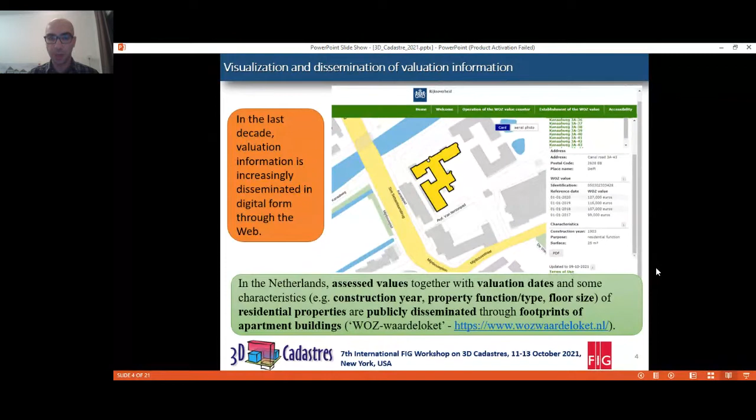However, 3D visualization of valuation units is required in order to disseminate valuation information more effectively and efficiently. In fact, some of the recently developed 3D cadastral prototype models include value as a characteristic of property units. So this leads to ask the following question: can 3D cadastral prototype models be seen as an effective tool to disseminate valuation information?

And this question leads us to our research questions, which are: can an identical or a modified version of a 3D cadastral visualization prototype be considered an effective tool for dissemination of valuation information? And what are the requirements and opportunities for web-based 3D visualization and dissemination of valuation information?

In valuation processes, legal and physical property characteristics are used as input data to calculate property values. But which one should we visualize to disseminate valuation information? Legal space, physical space, or both of them?

According to the International Association of Assessing Officers, land and property rights to be valued is the fundamental information for valuation. Therefore, we can say that land registry and cadastre can be considered as the main data source for both valuation processes and the visualization of valuation units, as they record the rights, restrictions, and responsibilities and their associated spatial units.

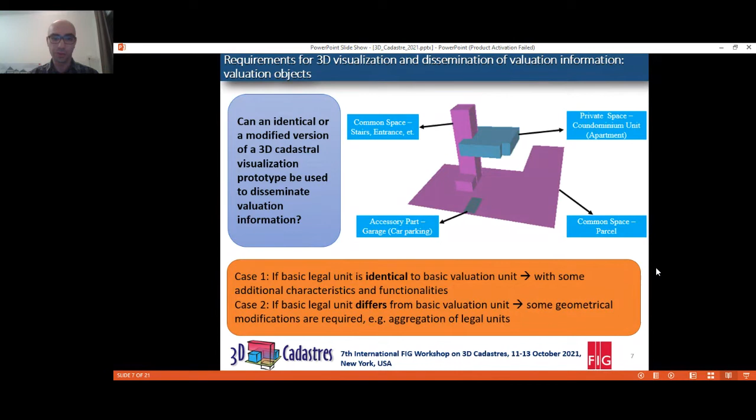But in some jurisdictions, basic legal units differ from basic valuation units. In this case, some geometrical modifications are required, for example aggregation of legal units to valuation units. But in both cases, the experience gained from the studies that developed the 3D cadastral visualization prototype can be utilized for 3D visualization of valuation units.

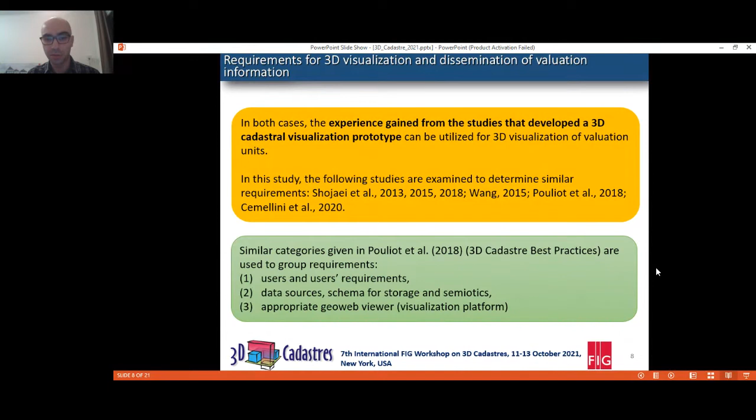We investigate the following studies to determine the requirements which are similar with 3D cadastral prototypes, and we use the categories given below: the first category is users and user requirements; the second category is data sources, data schemas for storage, and data semiotics; and the third category is the appropriate GeoWeb viewer. So we derived these characteristics, these requirements for 3D cadastral visualization.

These requirements are also valid for 3D visualization of valuation units. The users can be lawyers, notaries, real estate agents, or the general public in both cases. And the user requirements are: 3D geometric boundaries should be identified; private and common parts in apartment buildings can be represented and distinguished; 3D measurements can be performed; and an interactive 3D user interface should be available.

As for the data, descriptive or legal documentation can be included, and temporal aspects of property rights should be managed and included. As data sources, survey plans, floor plans, building information model data, and city models can be used. For data schema to store the information, an LADM-based schema can be used, or an extended BIM schema can be used. Semiotics - color and transparency - can also be considered.

For the visualization platforms, the following functionalities can be needed: zoom in, zoom out, color, transparency, spatial analysis, and underground view.

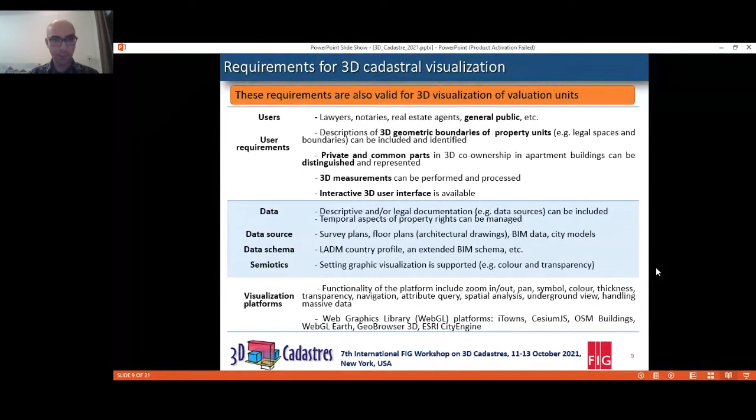So what are the specific requirements for valuation visualization and dissemination of valuation information? In the valuation case, the main users are the appraisers performing private and public valuations, and the customers of these valuations, such as the general public. The requirement characteristics include the value and the valuation date.

In such a prototype, several value types can be shared, and for transparency and accuracy purposes, input valuation data can also be shared—for example, building age, floor area, parcel size, accessory part type, and neighborhood characteristics. A similar data source can be used to visualize valuation units in 3D, and as a data schema to store both legal spaces of valuation units and valuation information.

The LADM valuation information model can be consumed because it includes not only valuation information but also the corresponding legal spaces, and it can be extended to include country-specific situations.

So what are the specific functionality requirements for dissemination of valuation information? Valuation information can be aggregated according to use types and valuation unit group types. Aggregating valuation units into groups can be considered the implementation of level of detail concepts in the visualization of valuation information.

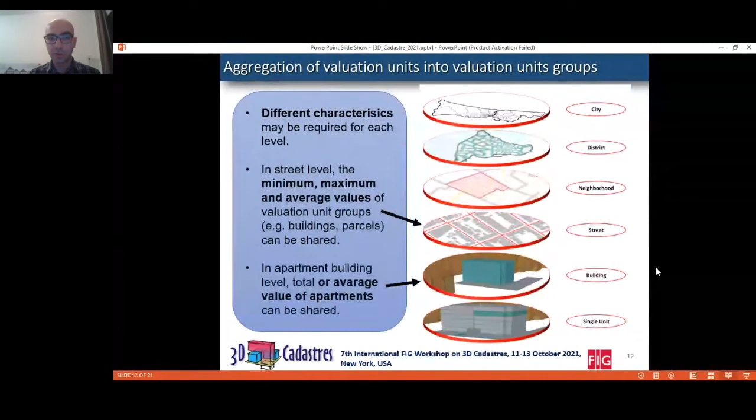In this study, we determined six different levels. For each level, different characteristics may be required. For example, at the street level, the minimum, maximum, and average values of the valuation units can be shared. At the apartment building level, total or average value of an apartment can be shared. At the city level, the average values of valuation units with different use types can be shared.

This approach is similar to sharing sales statistics, but in this case the valuation information is shared with its spatial component. Please note that the valuation information model supports recording valuation information at all these different levels.

So what are the specific functionality requirements? 3D view analysis can be required from a valuation information prototype. Support for thematic mapping and animations to enable effective dissemination of valuation information is required, and this is also valid for the 3D cadastral prototype.

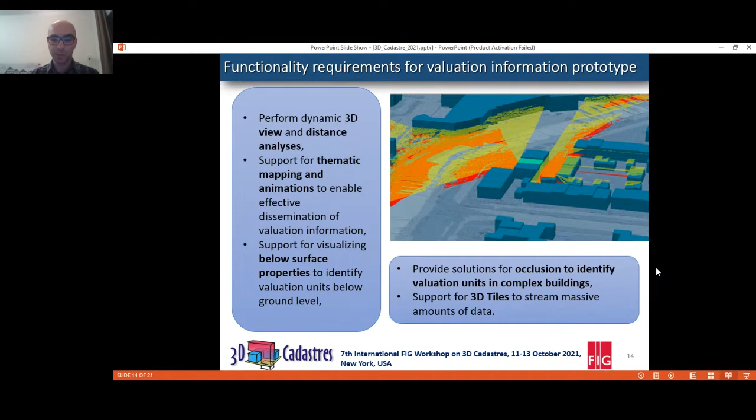Below surface visualization support is needed for visualizing below-surface properties to identify valuations below ground level. Solutions for occlusion are needed to identify valuation units in complex buildings, and support for 3D tiles to stream massive amounts of data. We investigate these WebGL tools.

We evaluate these WebGL tools, and our aim is to find an appropriate web-based solution for visualization and dissemination of valuation information. According to the requirements, two web viewers came forward: CesiumJS and 3D Tiles RenderJS. In our case, CesiumJS was selected because it provides the opportunity for 3D analysis tools, for example visibility analysis.

It supports time-dynamic visualization by means of the CZML format. With CZML format, you can create animations and thematic maps. CesiumJS is widely used in the domain of land administration by a large group of users, and the 3D tiles format is also developed by the same group. Because of these reasons, we selected CesiumJS, and this is the prototype we developed.

You can see the condominium unit information. You can select each condominium unit in this building. As you can see, legal spaces can be identified and selected. Hovering over the condominium unit, the color of the accessory part automatically changes.

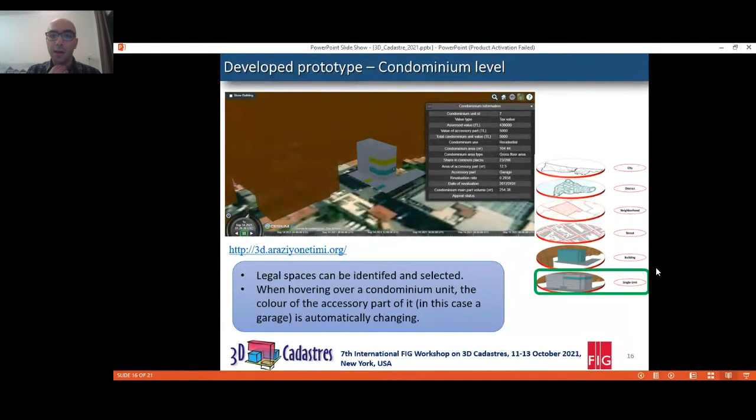When you click the condominium legal spaces of the condominium unit, you can see the characteristics and valuation information about these condominium units—for example, condominium use type, accessory part type, and valuation date are shared at this level.

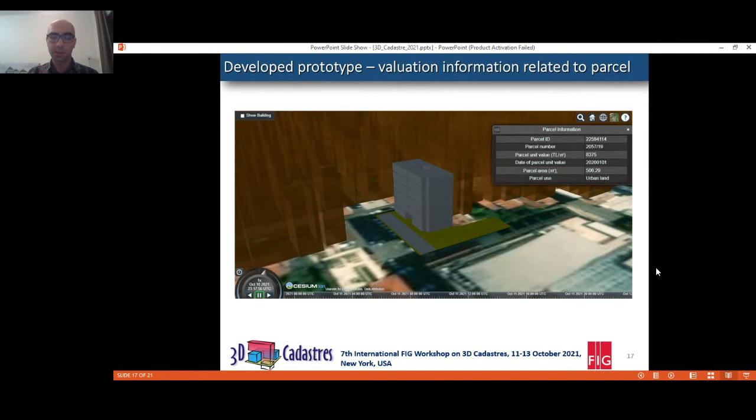You can also click the parcel to reach extra information about it, for example parcel unit value per square meter and date of parcel unit value. You can also select the building.

When you select the building, you can see some characteristics related to it, for example construction type, building age, and the unit cost price per square meter.

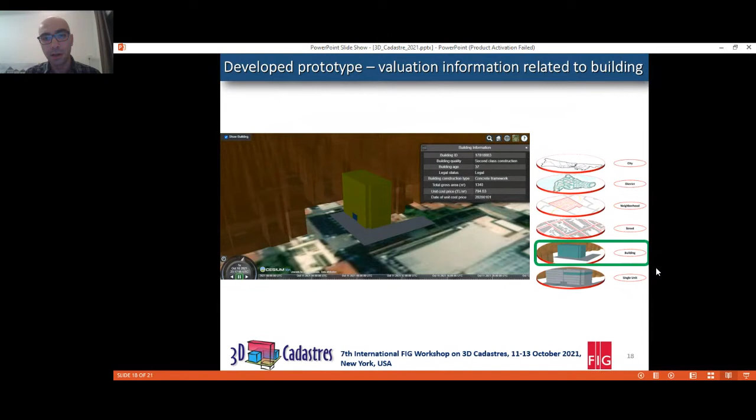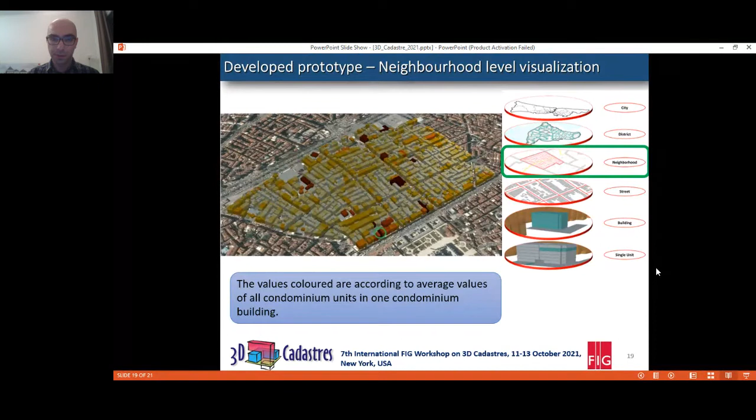So, concluding remarks. Developing a web-based system for visualization and dissemination of valuation information and their characteristics is a challenging task. An identical or modified version of the 3D cadastral prototype can be used for dissemination of valuation information with some additional characteristics and functionalities. On the other hand, having the option to visualize both legal and physical spaces of valuation units in the same prototype system would further support effective dissemination.

The developed prototype shows that the LADM valuation information model complete schema can be used for data storage, which can be used as a basis for visualization. The aggregation of valuation units into groups to share valuation information may be a good approach to implement. This suggestion may improve communication with users.

As for future work, I should note that this is an ongoing work. The developed prototype is not completed yet, and there is a lot still to be done. For example, the prototype system should be enriched with extra functionalities, such as more thematic mapping and 3D measurements, and it needs to be tested with more complete datasets. One obstacle is that it is very hard to find condominium-level information even in a neighborhood. Therefore, a methodology to derive relevant spaces in a building should be considered. Thank you for listening to my presentation.

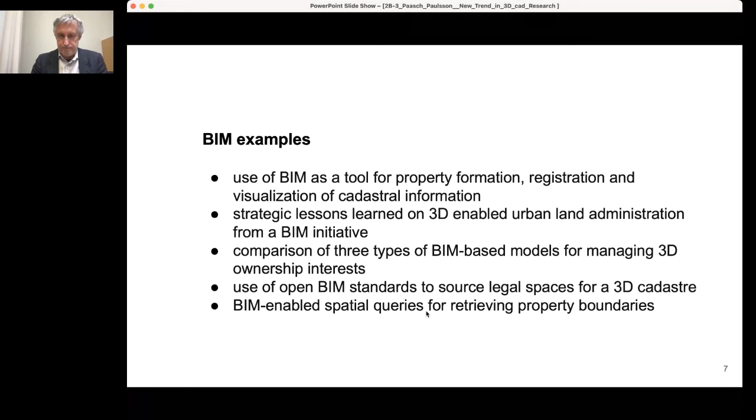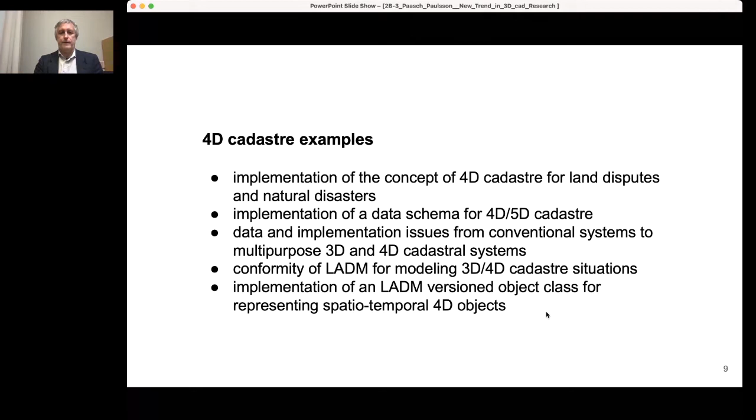The next topic is 4D cadastre: development of the concept of 3D cadastre by adding a time element. Here we have some examples: implementation of the concept of 4D cadastre for land disputes and natural disasters, implementation of a data schema for the 4D/5D cadastre, data and implementation issues from conventional systems to multi-purpose 3D and 4D cadastre systems, conformity of LADM for modeling 3D and 4D cadastre situations, and implementation of a LADM versioned object class for spatio-temporal 4D objects.

The third topic is marine and water. We all have a dream maybe of living by the sea and owning a plot of land at a beach, so water is a very important factor in land management - I would call it land and water management. That can also be from a legal aspect, who owns the water area or the area down to the water, and technical aspects, as well as developing an international institutional framework and administration system for it. We are used to a land cadastre, but water cadastres are not that common.

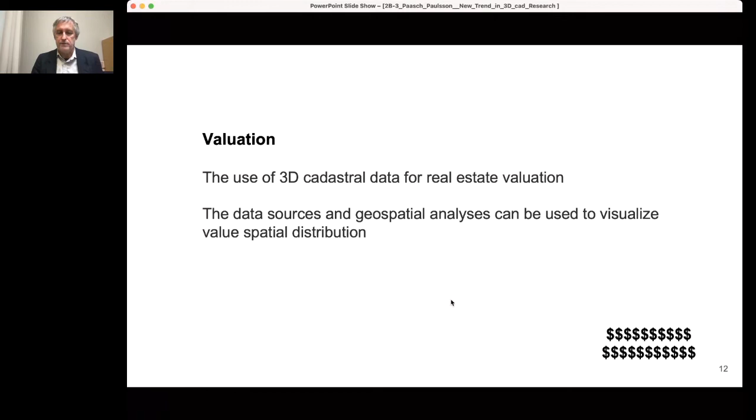Here we have some examples: possibilities of mass real estate valuation based on 3D vector terrain models, the role of semantically rich 3D building models and 3D cadastres in relation to valuation and taxation, the development of valuation approaches in relation to cadastres, why and how the CityGML modeling standard can be used in real estate valuation and transaction applications, the use of 3D data for better quality value estimation in the context of the LADM valuation information model, and developing 3D valuation unit profiles.

So we can see there has been some interest in these areas, and they are quite evenly distributed among our research networks. For example, BIM is mostly Australia, the Netherlands, Korea, and Sweden - just examples, there are more. There's also 4D cadastre: Croatia, Germany, Turkey, Indonesia. Marine water: Trinidad and Tobago, Greece, Argentina. And valuation: the Netherlands, Germany, Turkey, the USA, and the United Kingdom, just as examples. The interest is quite widespread.

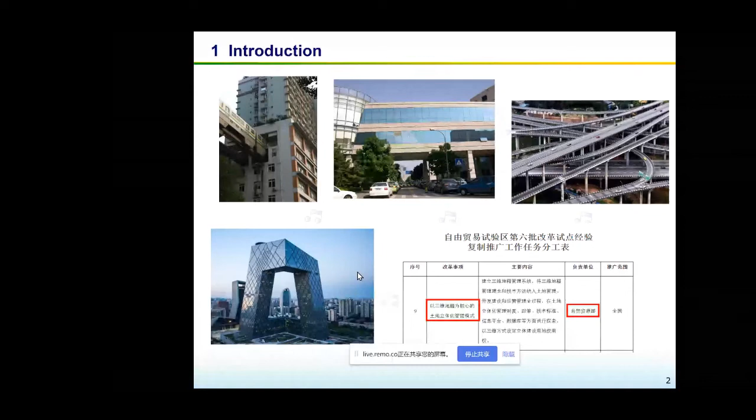Here show some cases. Buildings and construction normally have a plain ground with the same surrounding elevation. However, it was not always this way. Mountain area occupies 2/3 of land area in China, and many buildings and constructions are built on uneven ground, especially in Chongqing city, a very famous mountain city. The picture shows some scenarios in Chongqing.

So when we talk about buildings, we naturally assume that the building is located on the Earth's surface. Here, Earth's surface becomes a key reference for building to describe location relationships. If the different sides of the building are not flat or have different elevation, different height, where is the ground? Which level is the ground level? We should think about the spatial description.

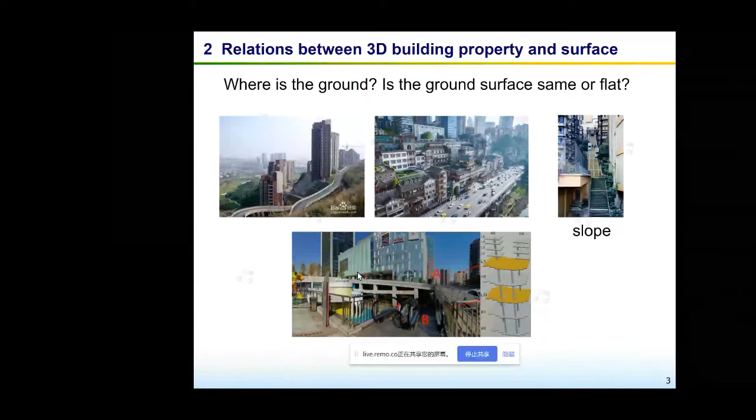This slide shows the reality of one case. Two neighboring buildings have different grounds. They are not purely horizontal or vertical neighbors, but diagonal neighbors. For the upper left building, its ground is labeled as ground B. However, it's very clear that ground B is also the top of the lower building. So when we talk about the Earth's surface or the ground level, where is it?

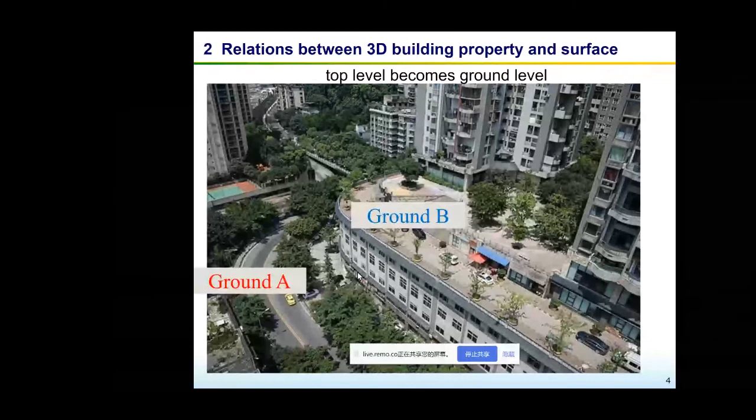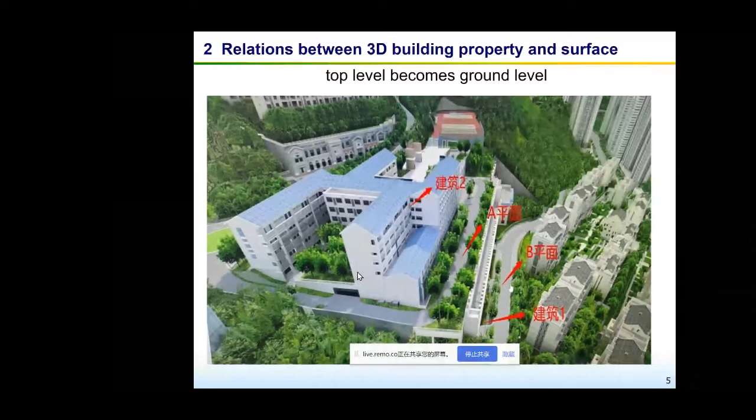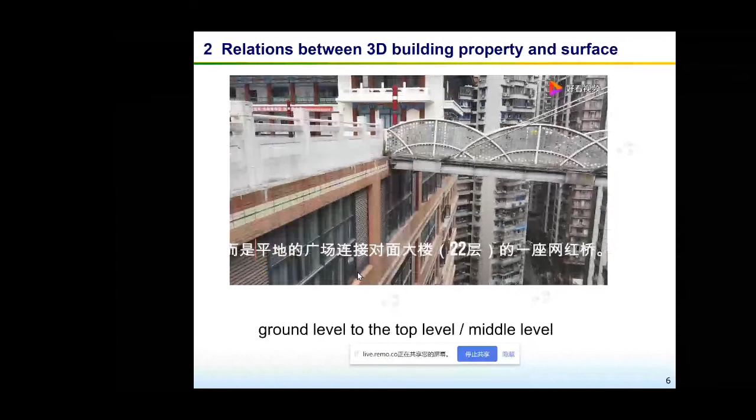This is another case for the diagonal overlap in Chongqing city. And this video gives us a surprise. From the view, we know that this location is the plaza or platform, the ground surface for the surrounding building. But when we move to the place, we find two bridges. And under the bridge, there is still a 22 floor building. So the ground is different at different places, or even for the same building.

Also, I would like to emphasize that these cases are very common in Chongqing, the mountain city, not a minority.

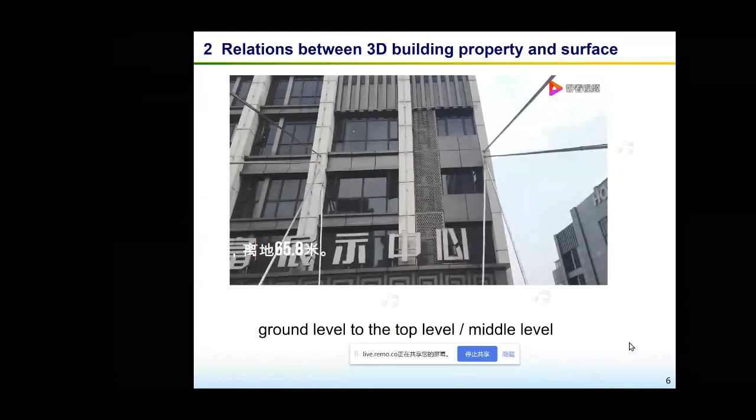So in order to clarify the relationship between the building and the Earth's surface, we must make certain the Earth's surface morphology. We divide the Earth's surface into three types: planar surface, slope surface, and terraced surface, as the slide shows. Also, we define the bottom face as the lowest bottom face of the building, and also the base face, which is where the building entrance locates, and this base face will touch the Earth's surface.

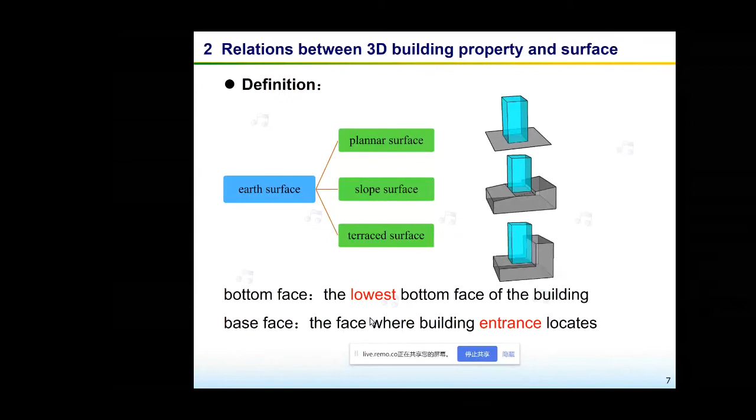Taking terraced surface into consideration, if we compare the building property with the surface ground, it could be three categories: one, the base face coincides with the bottom face; two, the base face doesn't coincide with the bottom face, which we can judge from the different height; and there are multiple base faces and only one of them coincides with the bottom face.

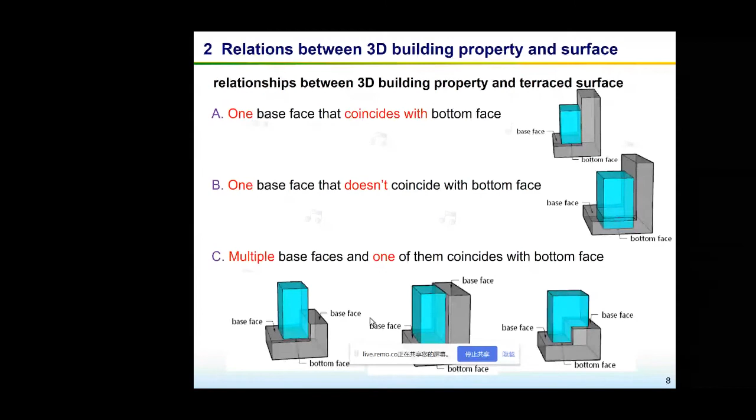If there are multiple base surfaces and one of the base faces coincides with the bottom face, combine the elevation between another base face and the bottom face - there would be three types, as the slides show. This case illustrates one type. Please be aware that here we only list the situation for one building.

If there are multiple buildings involved, the scenario is more complicated. So a clear description of the relationship between the building property and the terraced ground can enhance the floor semantics about the building, which could be crucial or important for 3D property description.

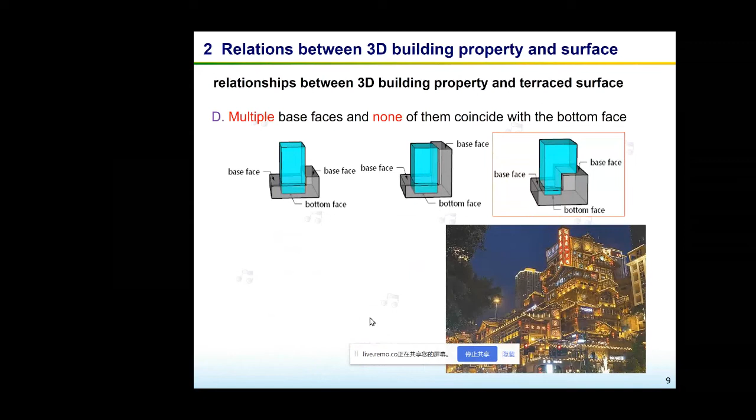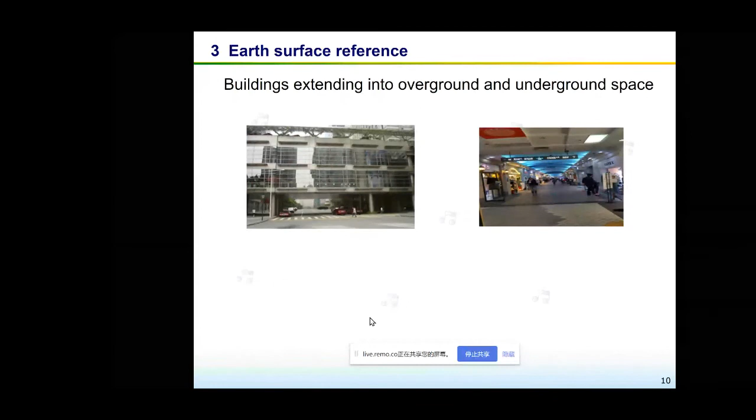Even if the ground surface is flat, we still need to understand the building space and underground space to get the correct relative locations compared to the ground surface. We know modern construction techniques support building and man-made structures extending into the air and underground.

The spatial location and shape of a 3D building property in 3D cadastre should be clearly portrayed. Also, this explicit description should include a spatial reference to the Earth's surface. So 3D relative vertical location can be described in 4 types: the building is on the surface, in the air, underground, or across the surface.

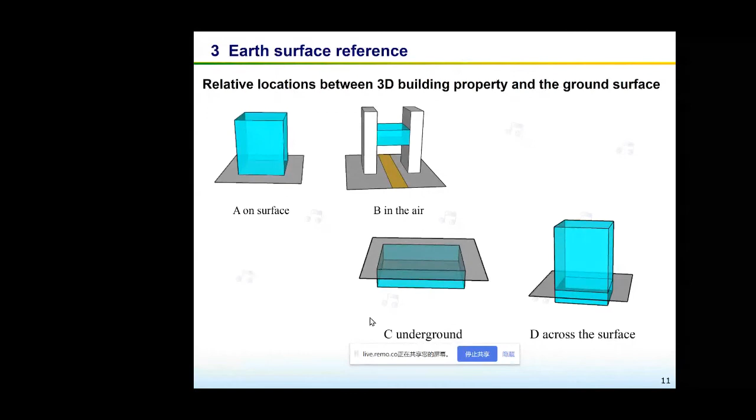We are very familiar with the 2D surface parcel. So when we talk about the 3D building property, 2D surface parcels are often used as a reference. This section illustrates the correspondence between the 3D building property and the 2D surface parcel.

One 3D parcel may touch more than one ground surface or ground parcel, like an overhead building connecting 2 buildings with a ground parcel, and an underground station connecting several surface parcels by its entrances and ventilation openings.

Yeah, it's an amazing thing in Chongqing.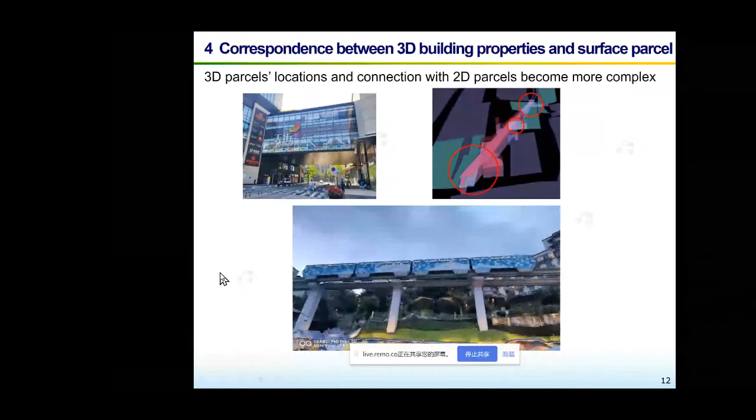I'll change it. So we can get the correspondence between the 3D building property and the 2D surface parcel in 4 types: one-to-one, one-to-multiple, multiple-to-multiple, or multiple-to-one.

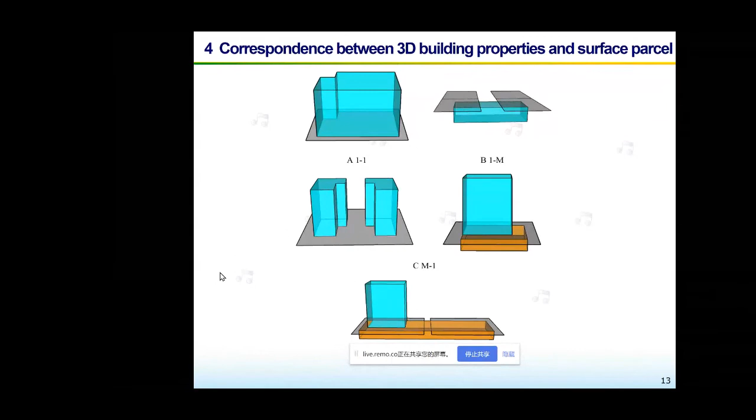So, a short conclusion: 3D building property is the main object in 3D cadastre. This presentation illustrates the classification between 3D building property and the Earth's surface with different cases, and these cases are very common in Chongqing, China.

So we must focus on the spatial description. It would enhance the description in 3D and promote our understanding of the spatial situations for 3D building property. In the future, further analysis about the consistency between legal geospace and physical geospace of building property, and their correspondence, can be made for 3D property units.

Like the dissemination about the property unit - I hope with the figures and the cases, the demo, we can analyze the building property compared to the Earth's surface. We can realize the complexity of describing 3D building property spatially.

And also in China, we now have raised a Chinese national standard of spatial description about the 3D property unit. It will be used for the registration of the 3D property unit. Thank you very much.

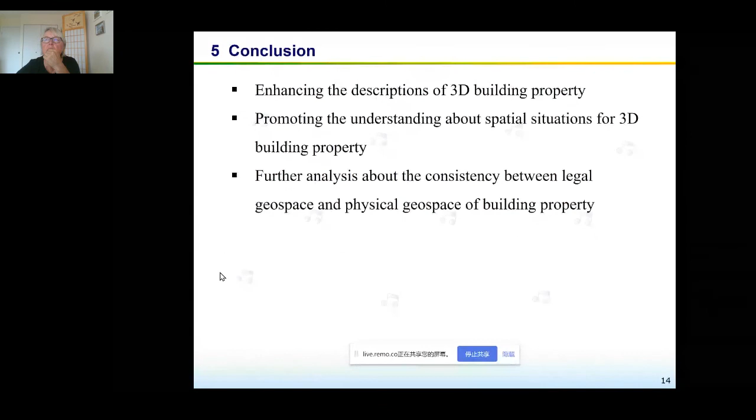I would like to start with the first question. Well, it was really impressive, the train going into the building. Wow, yeah.

Can you explain a bit more how ground surfaces are currently mapped in China or defined in China? And why is it so important to have this ground reference? Can you say a few words to help us understand why it is interesting and important to have your work?

Normally we think the ground surface is flat, and the ground surface around the building is the same. But in mountain areas, it's quite different. Even for just one building, the front has one height, but in the background it's another height. So different entries at different sides have different levels of floors.